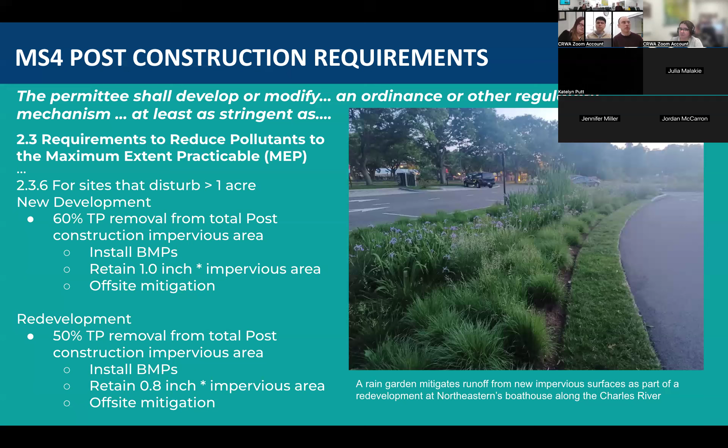And this is typically done using rain gardens or infiltration systems. Often these are vegetated systems that can really add some aesthetic value, add some habitat value, do some greening and cooling within the city. Next slide.

So I'm going to briefly introduce some of the challenges with this regulatory framework. So the first one is that we talked about 60% phosphorus removal or 1 inch retention. There's a challenge because the retention standard is not equivalent to the phosphorus reduction standard. And this is a curve from attachment 3 to appendix F of the MS4 permit.

If you don't love reading these curves, I'll just give you the punchline, which is that for a typical green infrastructure practice, an infiltration trench on decent soils, if we are retaining the first inch of water, we expect to remove 94-95% of the phosphorus that's falling on that site. So, first inch, 94-95% removal. If we're looking at 60% removal, it's a lot less than 90%. That's equivalent to about retaining the first quarter inch on site.

So, one challenge that we have right here is that there are 2 different standards within the MS4 permit. One of them is very strong, and one of them is not as strong. Next slide.

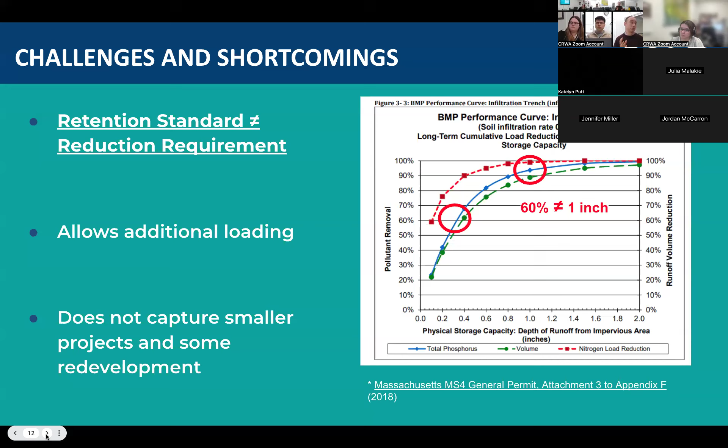A second and more fundamental challenge in the MS4 permit is that it allows additional loading. This is a permit that's designed to protect our watershed, designed to protect lakes and ponds, but it doesn't really do that. It just makes new development less harmful. It doesn't make it not harmful. And similarly with redevelopment, it in many cases can reduce the loading associated with redevelopment, but it doesn't require correction back to a natural state that's going to really achieve our clean water goals.

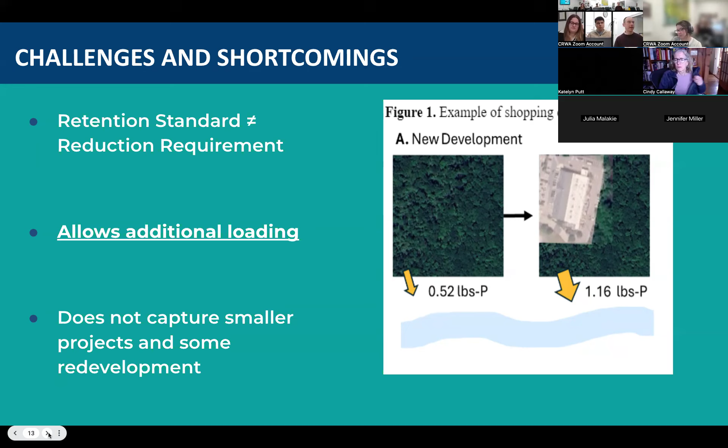And this is just a little example. If you add an acre of impervious area and mitigate 60% of that load, you're still going to end up with additional loading into the river. Next slide.

Finally, a big challenge with the MS4 permit is it only regulates projects that are greater than 1 acre. And from EPA's watershed analysis, from a lot of different parcel-based analysis, this graph comes from the RDA permit, or from the property parcel analysis that's part of the RDA permit. But what you can see is, even for commercial, institutional, and industrial properties, about 50% of the phosphorus loading in our watershed comes from sites that are smaller than 1 acre.

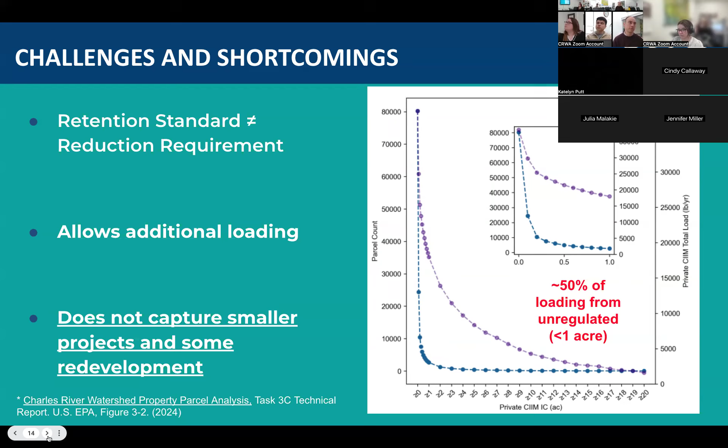And when we have a permit system that's only focused on larger properties, we're missing the opportunity to mitigate nutrient loading from these smaller sites. And we're missing a lot of opportunities to do that. Next slide.

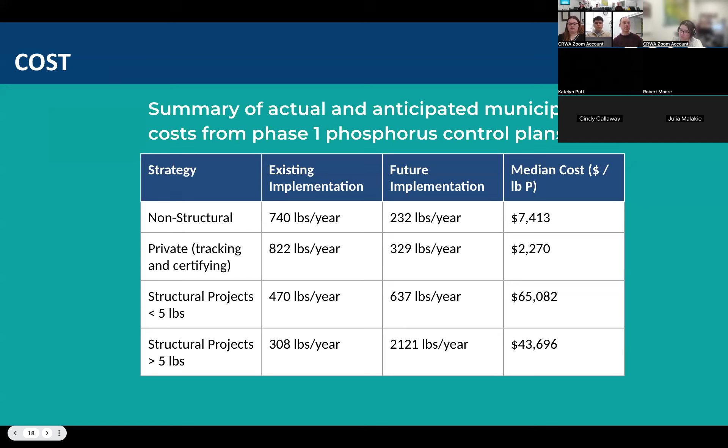Another point on this, when we look back at where BMPs have been implemented, to date, most of the BMPs in our watershed are on private property. But as towns are planning for the future, they're really focused on public property. So a goal with this project is to equip towns to do better with harnessing development to achieve nutrient reduction on private property. Next slide.

And through the climate compact, through the flood model, we've looked at a range of different scenarios to figure out what can we do within our watershed to make sure that the future 10-year storm is not causing way more flooding than the current day 10-year storm. And one of the solutions that has really risen to the surface is looking at something similar to the Watertown rule. Watertown, as we've teased throughout this presentation, has a requirement to retain and infiltrate the 100-year storm on site for many projects.

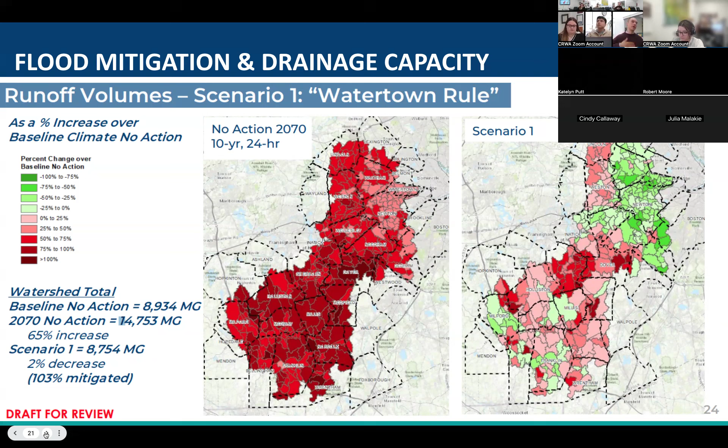And the Charles River flood model was able to model what future flooding would look like if that rule was applied across our watershed. And in green, you can actually see parts of the watershed that would have less future flooding than they do today if that rule were applied and rolled out coincident with new development and redevelopment. Next slide.

So I'm going to turn this back over to Ari, who's going to give you some of the specifics of the work that we did with UNH and what we found. Thank you, Max. So like Max just said, I'm going to dig a little deeper into how we got to the recommendations that we talked about a little bit earlier and that we'll talk about later. Carly, can you move to the next slide?

So with what we just talked about, the Charles River Watershed communities are navigating two urgent and interconnected challenges, which is meeting these strict TMDL nutrient reduction goals, but also addressing increasing flood risk fueled by climate change. One of the most impactful and cost-effective tools at the disposal of municipalities is a proactive stormwater regulation. When designed with intention, local regulations can harness private development to advance public goals like improving water quality, building infrastructure resilience, and reducing flood impacts.

So to support this approach, CRWA partnered with UNH at their Stormwater Center to conduct a comprehensive review of the stormwater bylaws and regulations across 33 municipalities in the watershed. As a part of this project, our team took the time to locate and thoroughly review each of these regulations for each municipality within the watershed. This process allowed us to have a better understanding of the diverse landscape, not only in terms of urbanization, but also in terms of how communities across the watershed are already taking an innovative approach to managing stormwater.

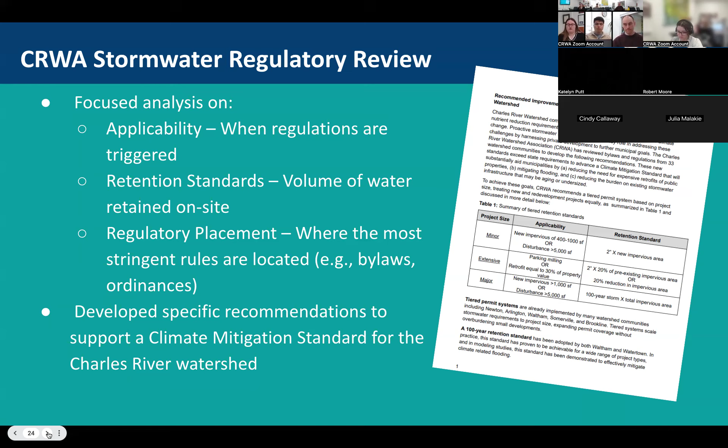These regulatory changes are a smart, scalable way to ensure development contributes to long-term stormwater solutions without requiring major public investments up front. As someone who works a lot with our municipalities in our watershed, the cost of doing a lot of these things in the current climate we're in has been a topic that I hear a lot about. So we wanted to keep that in mind. By making smart regulatory changes now, municipalities can build a more climate resilient future at a lower cost and with broader stakeholder support. Next slide.

So I wanted to highlight the unequal approaches and the spectrum we see in our watershed. So these are 3 towns in our lower basin: the city of Cambridge, the city of Newton, and the city of Watertown. And they really range in how they have their stormwater regulations implemented. As Max has mentioned, Watertown, for any project, must provide retention of that 100-year storm on site, which has been the gold standard that we've really talked about in our watershed.

The city of Newton is a good example of showing a tiered permit system. They do a minor and major permit, and they have a pretty big range on what projects fall into that. And then the city of Cambridge takes a different approach by including parking spaces in their applicability, but they do tend to stay within the state standard of reducing phosphorus loading by 65%. So we're seeing in these more urbanized areas, there's a really unique way in each area of taking this approach. So I just did want to highlight some of the things you'll see in the matrix. Next slide.

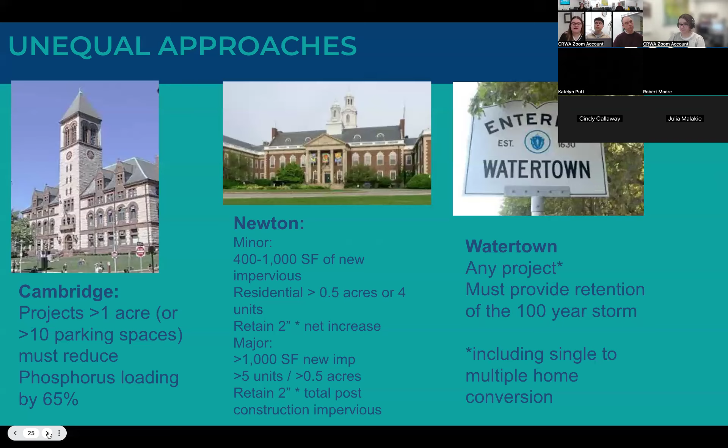So we're going to dive back into the recommendations and talk a little bit more about those. Next slide. So as we talked about earlier, just to review, because I know people have joined late. To achieve these goals that we've laid out, in our partnership with UNH, we developed this tiered permit system based on project size. So one thing I really want to emphasize, and I'll probably say a few times, is that this system is designed to treat new development and redevelopment projects equally.

In the state standards that are set, you see new development and redevelopment standards, and we've come to the conclusion that, to reach these goals, not viewing these projects differently but viewing them as meeting the same standards is going to be the most beneficial for towns. So as you can see in our table here, we look at minor permits. This includes new impervious surfaces between 400 and 1,000 square feet, or land disturbances over 5,000 square feet. When this permit gets triggered, you would be required to have a 2-inch retention times the new impervious area.

For these extensive retrofit permits, that is a third tier that we're adding in. We would be looking at parking lot milling or substantial retrofit, so a retrofit that may be equal to 30% of the property value. And when looking at that, we would hope to see a 2-inch times 20% of the pre-existing impervious area retention, or a 20% reduction in impervious area.

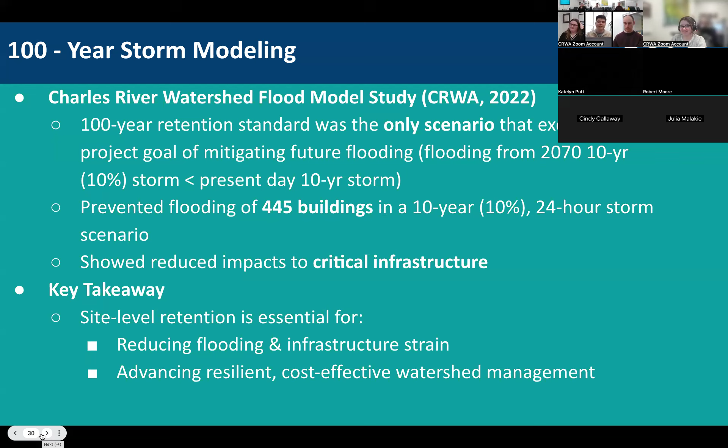So after going through the why with Ari and Max, I'd like to take a little bit of a deeper dive and showcase the how. So basically, what do these projects actually look like on the ground? And we're very fortunate to be able to look at these real examples of the standard in the watershed. And that's with a special thanks to Watertown, because they keep such a clear and accessible record of current and pending project reports on their city website. Next slide, please.

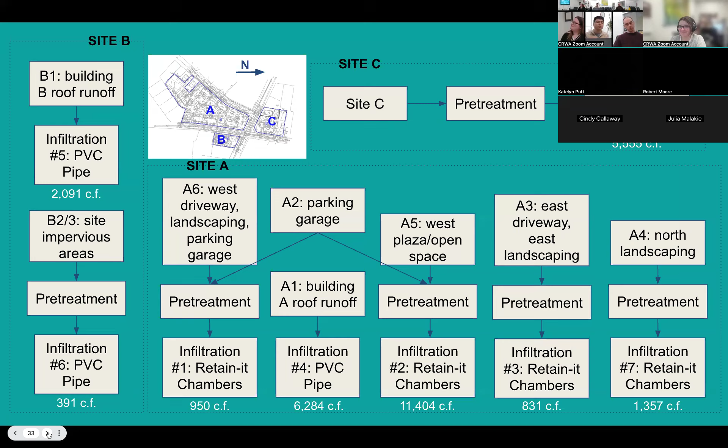So infiltration systems can range from simple to complex, or even more complex from this slide. And I can go ahead and regurgitate the stormwater report for each of these projects in super painful detail, but we compiled a summary of each, highlighting what we believe is most useful to you to start imagining what types of projects can meet the retention standard.

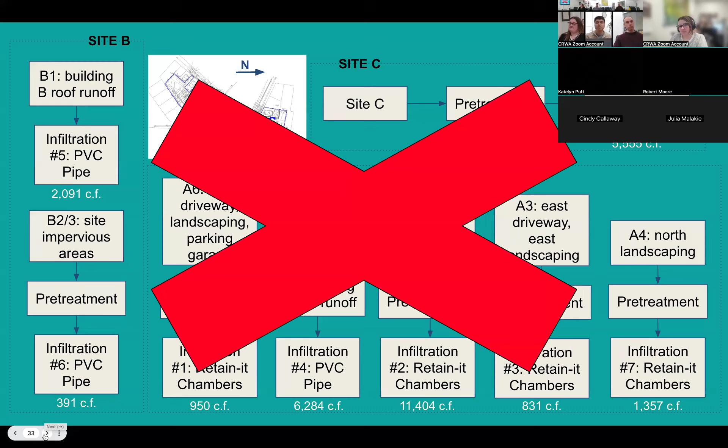So thankfully, I don't have to go through this complex diagram with you, but the big picture for Willow Park is that all developments in general work as a system of systems. You don't need to create a huge interconnected network of complex drainage systems to meet this retention standard. And to emphasize this, I want to point out the infiltration system at Site B of the proposed plans for Willow Park.

Basically, all of the runoff from the site, pavement, roadways, and landscaping will run into inlets that are on the ground, and they treat the water first of solids and oils, so they go through that pre-treatment phase on the left, and then they're directed into infiltration systems that are under the ground. Roof runoff is treated differently, and it goes straight into the infiltration systems that are underneath the footprint of the building at Site B. So that one doesn't need to go through pre-treatment.

And at a glance, the entire project will treat around 55,000 cubic feet of runoff that is attributed to the 100-year storm. And I'm going to point out that the static holding volume of the infiltration system is significantly less than the 100-year storm volume. And that's because the system has super fast infiltrating soils that drain the storage system quickly enough to not need 55,000 static cubic feet of volume.

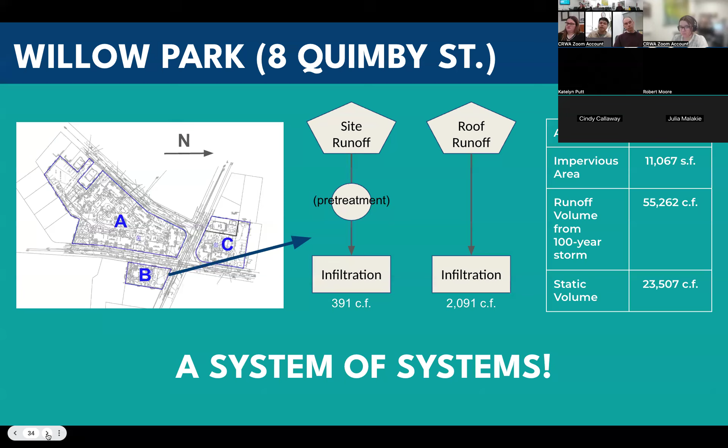So the infiltration system is able to function efficiently while only statically holding around 40% or 3.5 equivalent inches of rain compared to the 8.9 of the 100-year storm. Next slide, please.

And now, not all projects are going to be as big or as expensive as the redevelopment at Willow Park. Some of the smaller projects captured by the retention standard include this residential development at 6 Church Hill Street. And this one doesn't have the capacity for huge or complex systems. This project does almost the same thing as Site B in the last slide, but it only utilizes a single infiltration chamber. In this diagram, it's named a recharge tank.

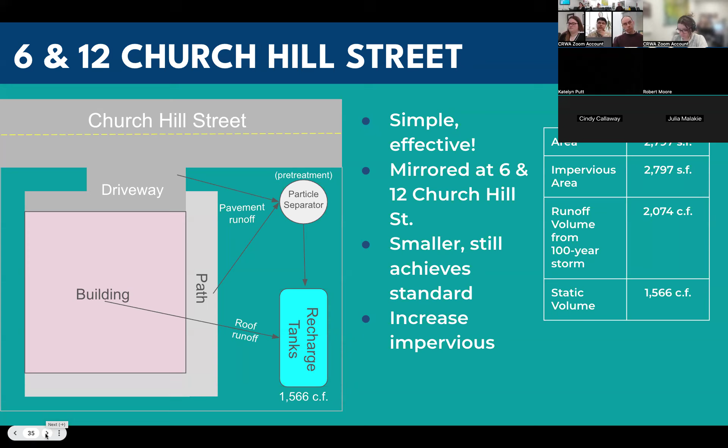And the exact same system is mirrored at 12 Church Hill Street. They're the exact same development, just on 2 different lots. And this project still achieves what the larger projects need to achieve, but with a much smaller footprint. The project was required to produce a stormwater report because of the increase in impervious area that it proposed. And again, we see that the 100-year storm volume is higher than the static storage volume because the soils allow for a much smaller storage capacity. Next slide, please.